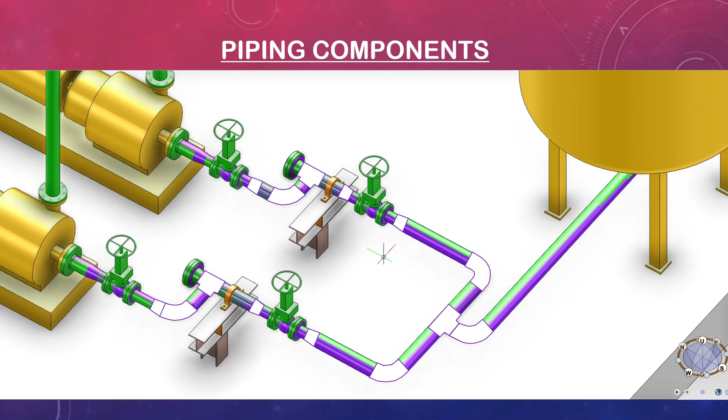If you thought our last deep dive into industrial pipe specifications was complex, prepare yourself. We're diving into part two of this forensic examination, moving beyond the simple straight pipe and focusing on the crucial components that allow engineers to build a functional system. We're talking about the difference between moving water and moving high-pressure superheated steam in an environment that cannot afford to leak. Our mission today is a targeted exploration of the components that define flexibility, integrity, safety, and ultimately the lifespan of any industrial piping system. We're talking fittings and flanges.

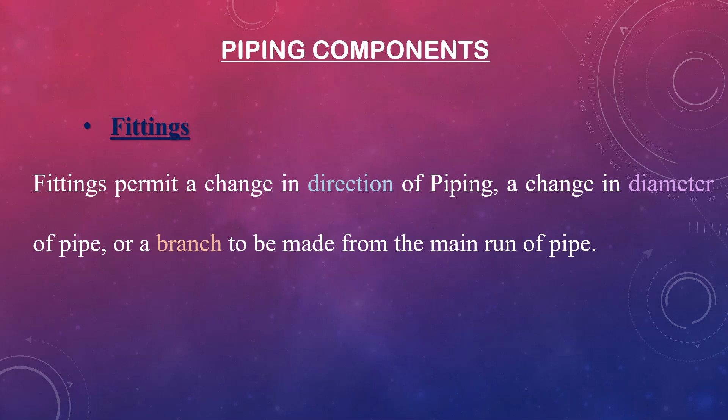Let's unpack this and start at the physical foundation, the fitting itself. We're defining fitting simply as the components that execute directional changes, diameter resizing, or branching within a run of pipe. Fittings come to the project via four primary manufacturing routes: they are either formed from plate or existing pipe material, machined from prepared forged blanks, classically cast using molten metal, or for lower pressure applications, molded from specific industrial plastics.

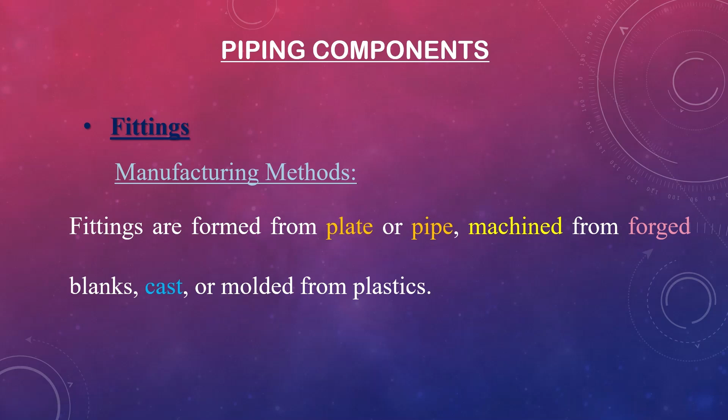We need to focus on the metal side first, because that's where the truly punishing high-pressure specifications reside. Can we start with manufacturing components from pipe material itself? That method is primarily used for creating long radius bends, produced either through hot bending or cold bending. For example, hot bending might involve inducing a curve using high-frequency induction heating while the pipe is mechanically stressed. It's very precise and ideal for large, gentle curves.

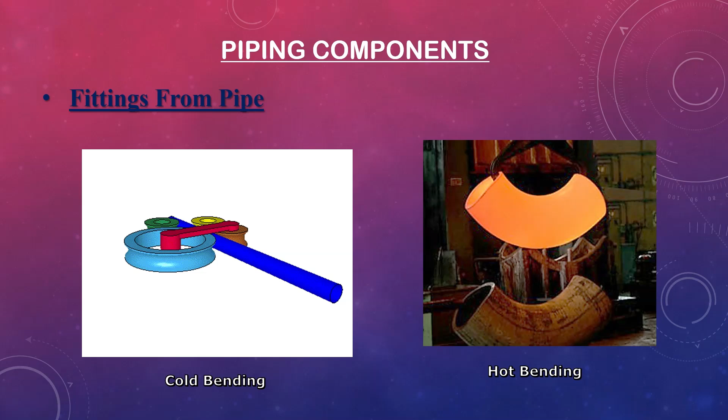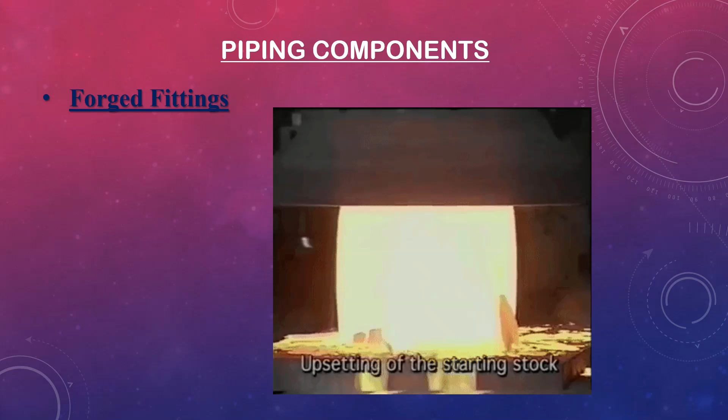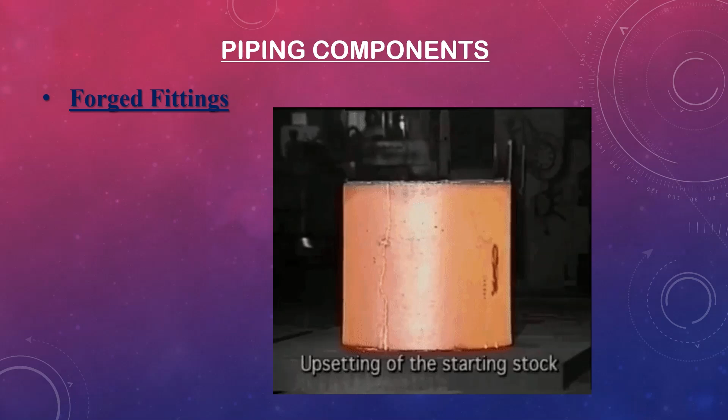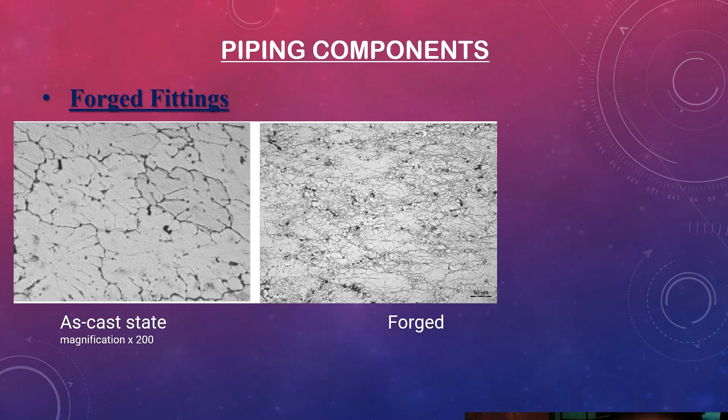But when we talk about elbows, tees, and components that face really intense thermal and mechanical stress, we usually pivot to forging. Why is forging considered the gold standard for high-integrity fittings? Because forging is fundamentally about physical strength through structure. It uses intense pressure hammering or squeezing to achieve plastic deformation of the metal blanks. Picture a cheap cast iron skillet versus a finely crafted forged knife. Casting leaves behind microscopic defects like voids or a loose structure. Forging eliminates those as-cast defects, and critically, it optimizes the internal microstructure, aligning the grain of the metal along the stress lines.

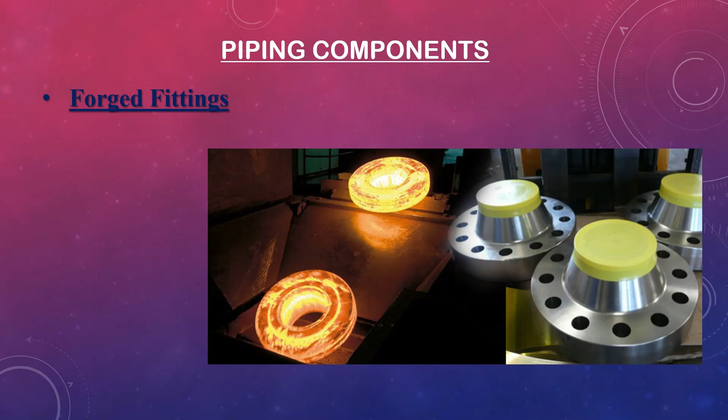So it sounds like you're engineering the component at a molecular level, and that results in superior strength and durability. Absolutely. That's why the most critical components—elbows, flanges, tees, unions, couplings, and caps—are overwhelmingly forged.

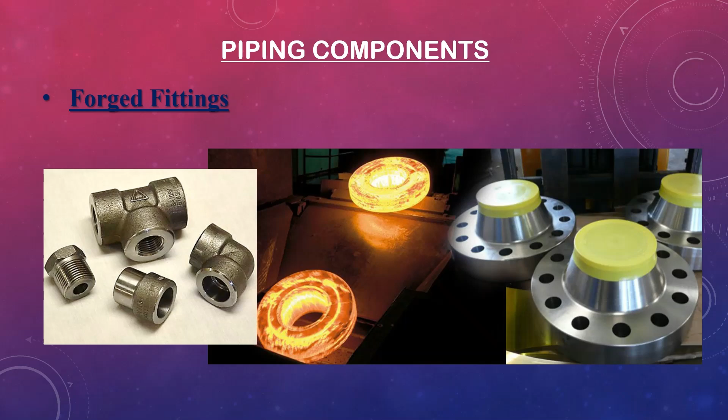Now, contrast that high-integrity method with casting. You mentioned cast iron fittings—where do they fit in the industrial puzzle? Cast fittings are simpler, created by pouring molten metal into a mold. They are used for lower pressure or non-critical applications. For instance, non-malleable gray iron is mainly used in residential or commercial construction for sanitary and waste drains. You also have ductile iron, which is stronger and often comes flanged, and malleable iron, which is cast iron that has been heat-treated post-casting to make it tougher and less brittle.

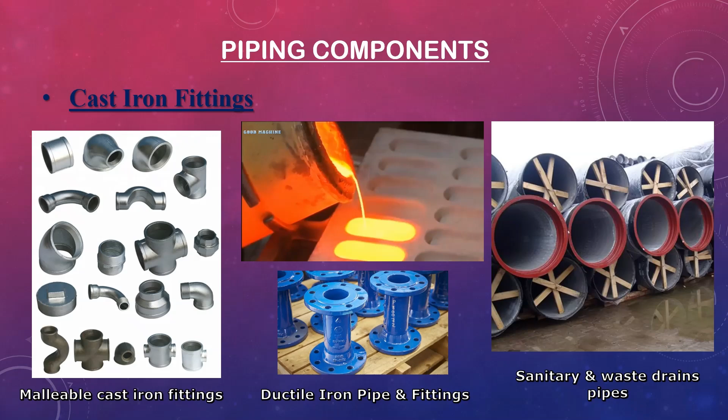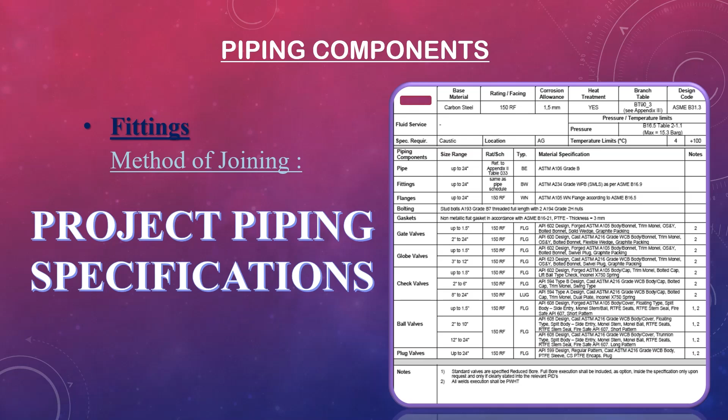So once the fitting is manufactured and ready for the field, the entire specification pivots to the joining method. The project specification dictates the choice for every single joint. This isn't optional, is it? No, not at all. The joining method is a non-negotiable choice based on the fluid, the pressure, the temperature, and the size. We have four primary methods, and the decision tree for choosing one over the other is extremely technical.

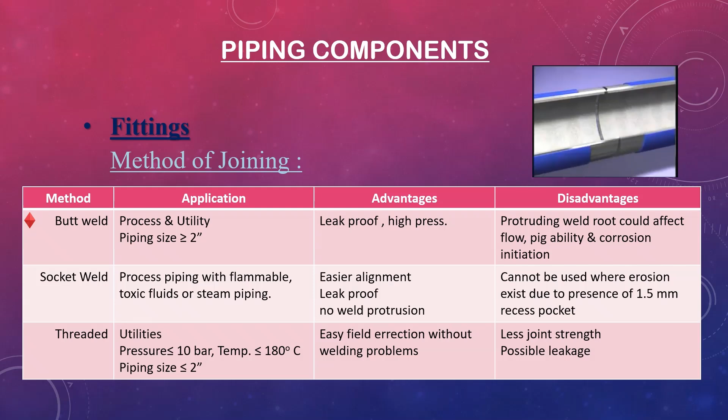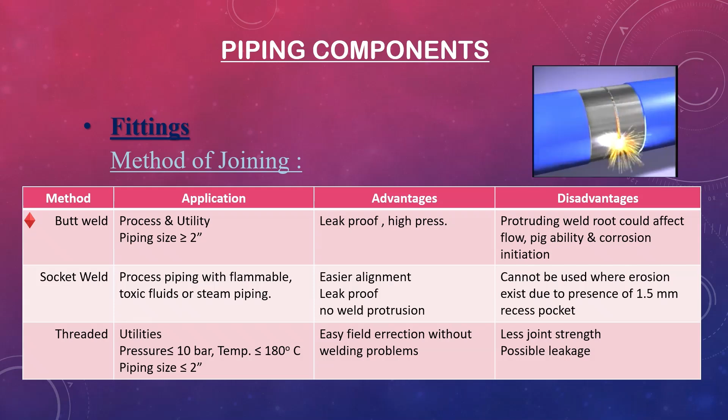Let's start with butt welding, which sounds like the most permanent and robust solution. Butt welding is mandatory for high-stakes process and utility services, especially for pipe sizes larger than 2 inches. This is the definition of a totally force-locking joint, offering maximum resistance to leakage, and is rated for the highest operating pressures. We see this in critical lines for drinking water, raw industrial waters, and high-pressure steam.

But you mentioned the downside, which is a key technical trade-off—the internal weld root. That protruding weld root can be a significant disadvantage inside the pipe. First, it may slightly affect flow characteristics. Second, and maybe more critical for maintenance, it impacts the ability to use internal inspection devices, or PIGs. For listeners unfamiliar, these are self-contained tools, inspection or cleaning robots pushed through the pipeline to check for corrosion or debris. Exactly. And if that weld root sticks out too far, it snags or damages the PIG, halting inspection. Furthermore, that protruding root creates a tiny turbulence point that can sometimes initiate corrosion over decades of service.

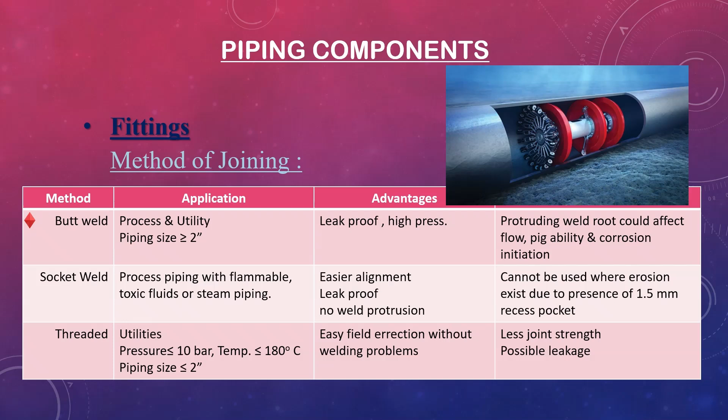So if butt weld is for big, high-pressure, high-flow applications, the socket weld seems tailored for smaller, equally critical lines. Socket weld fittings are designed for process piping under 2 inches that carry flammable, toxic fluids or high-pressure steam. Their pros are clear: they offer easier alignment and faster assembly than butt welds, they are leak-proof, and they avoid that problematic internal weld root protrusion. But the drawback here is startlingly specific, hinging on a microscopic distance. Socket welds cannot be used where erosion is a concern, and that's due to the mandated presence of a 1.5 millimeter recessed pocket between the pipe end and the fitting wall.

If you have erosive fluids moving at high speed, that tiny stagnant pocket becomes a vortex, initiating rapid corrosion or erosion failure. It's a fundamental physical limitation of the design.

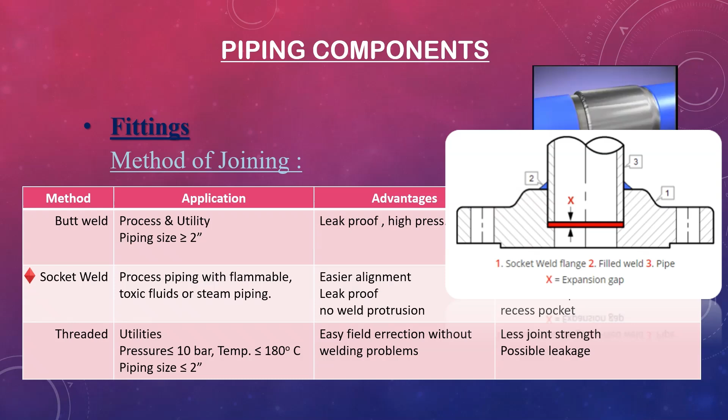During assembly, there's another precision rule: the expansion gap. You must leave a 1.5 millimeter expansion gap between the pipe end and the socket before welding. This gap accommodates the thermal expansion that occurs during welding itself. If you don't leave that gap, the weld is under immediate, immense internal stress as it cools, leading to eventual cracking. That level of precision is truly humbling.

Finally, we have threaded fittings. These feel like the easy access option. They aren't. Threaded fittings are severely limited, restricted mainly to utility services, and only under strict parameters: pressure must be 10 bar or less, temperature 180 degrees C or less, and pipe size 2 inches or smaller. The major benefit is installation speed without complex welding.

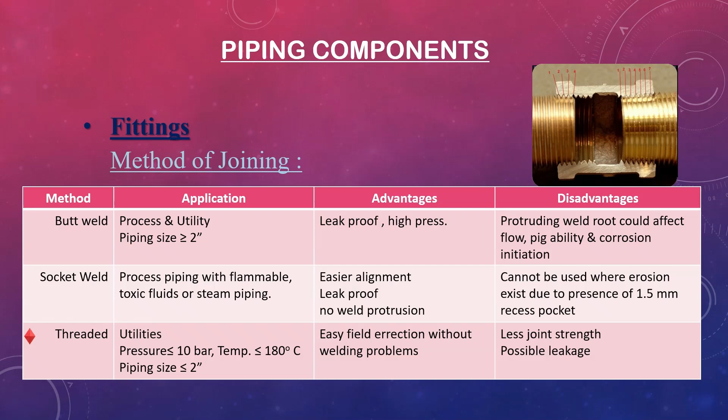But how often does that speed compromise the system? Well, that's the critical compromise. Threaded joints offer significantly less joint strength and carry a much higher possibility of leakage compared to any welded connection. They are fundamentally a lower integrity joint, only justified by the ease and speed of field erection for non-hazardous services.

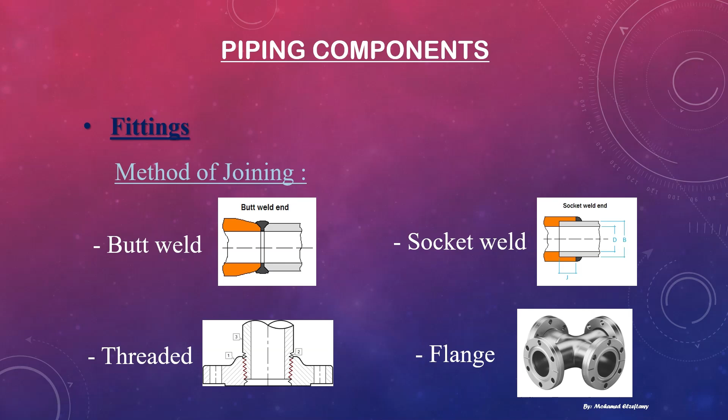So we've covered permanent joints. But what if we need to open the system for maintenance, perhaps replacing a critical valve, inspecting a pump, or swapping out a segment? That's where we pivot to the dismantling joint, the flange. Flanges are essential whenever you need a connection that must be dismantled for inspection, routine maintenance, or replacement. The system simply can't function without them.

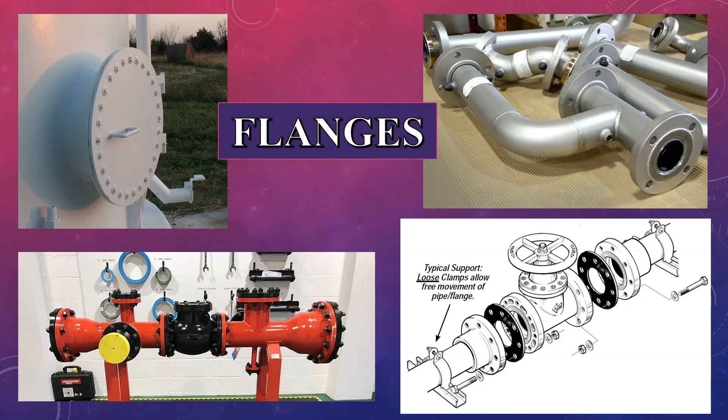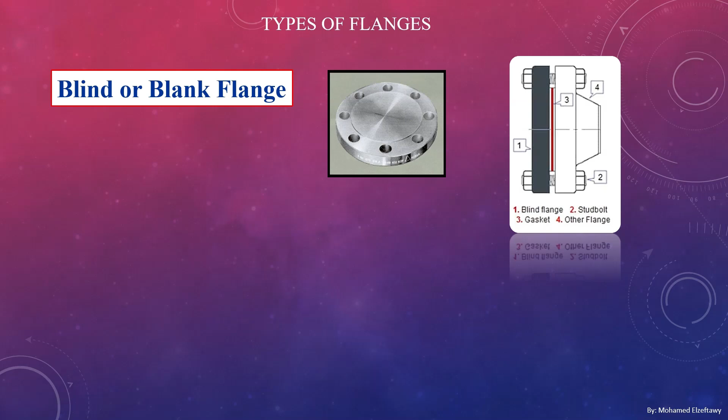Let's look at the variety, because the configuration determines its purpose, starting with what is essentially a heavy-duty cap, the blind flange. A blind flange is used to terminate or permanently close the end of a pipeline or a vessel nozzle. Crucially, because it's bolted, it provides quick bolted access to the interior of the line for inspection, which is impossible if you simply weld on a cap.

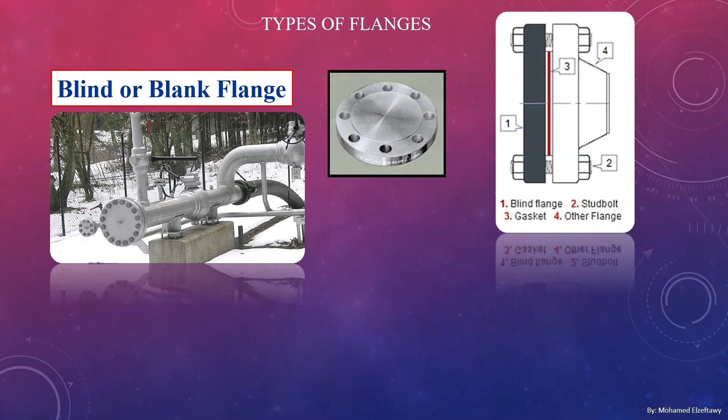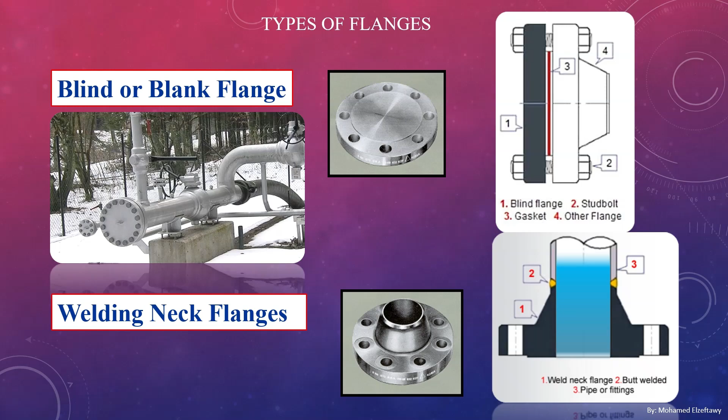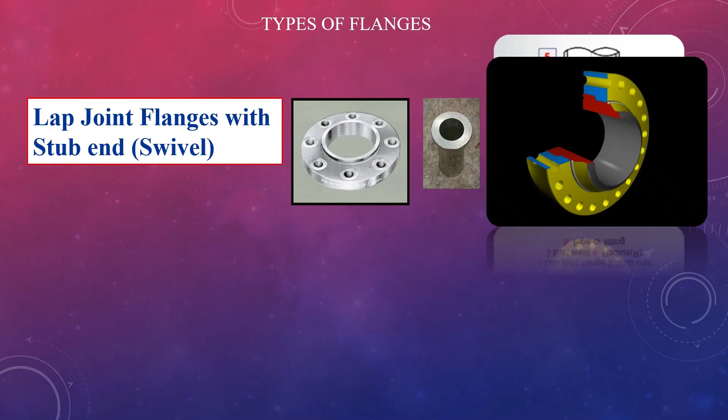That makes perfect sense. Now, the lap joint flange, or swivel flange, sounds like the maintenance dream. It is. It is designed specifically for systems requiring frequent dismantling. The genius is that the flange can rotate freely around a stub end that's welded to the pipe. This allows for quick bolt hole alignment. You can spin the flange to match the holes, making erection much easier, especially when dealing with large, heavy, and difficult to adjust piping runs.

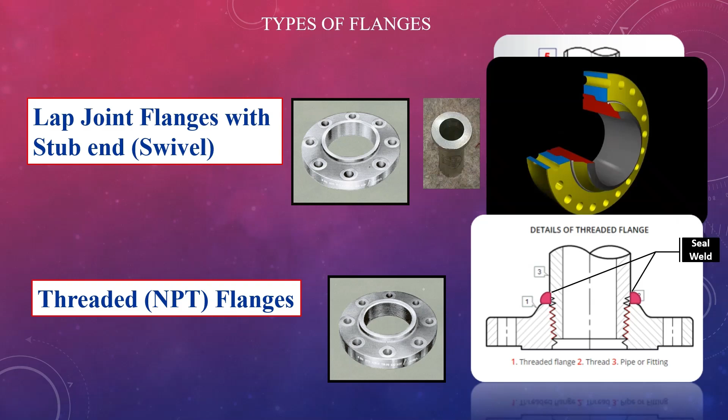Moving through the rest: threaded flanges and reducing flanges. What defines their operational envelope? Threaded flanges offer that benefit of assembly without welding, making them ideal in explosive or highly restricted environments. However, they are highly susceptible to leakage caused by thermal cycles or bending stresses. So they have a weakness. They do, and engineers often mitigate this risk by seal welding them after assembly, which, ironically, eliminates the original non-weld benefit.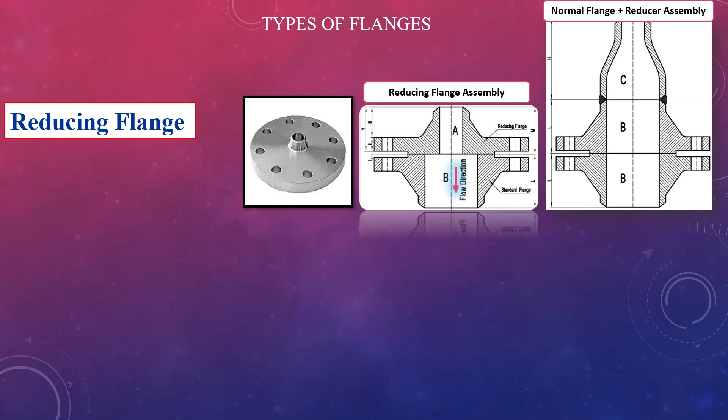And the reducing flange performs two jobs at once. It reduces the pipe diameter while also providing a flanged connection. But here's the critical operational detail: the flow must travel from the smaller side to the larger side. If the flow is reversed, the sudden increase in velocity and subsequent expansion will cause severe turbulence and potentially localized erosion right at the reduction point.

Finally, the orifice flange, which is all about metrics. The orifice flange is strictly for measurement. It determines the flow rate by measuring the pressure drop across an internal device called the orifice plate. The assembly is unique because it includes specialized fasteners called jack screws. These screws are specifically built into the assembly to force the two flanges apart, allowing maintenance crews to inspect or replace that orifice plate without extreme manual force.

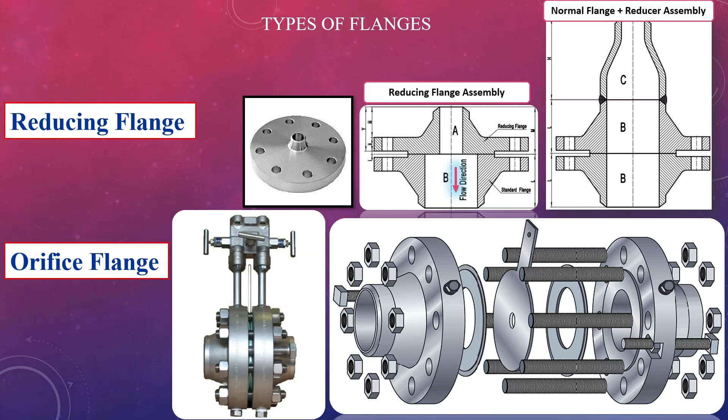So the flange design and material get the liquid where it needs to go, but the specific contact surface, the face and the seal, the gasket, ensure the system doesn't hemorrhage its contents. Let's move to section 4, and the critical details of flange faces and gaskets.

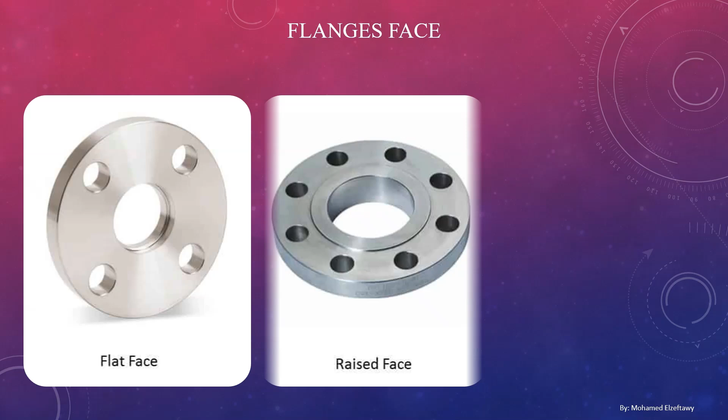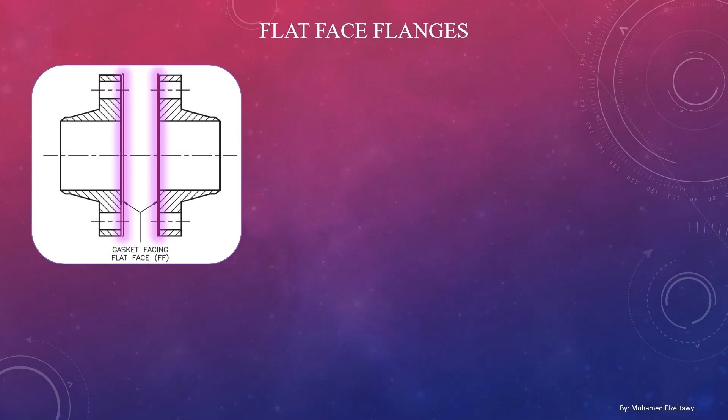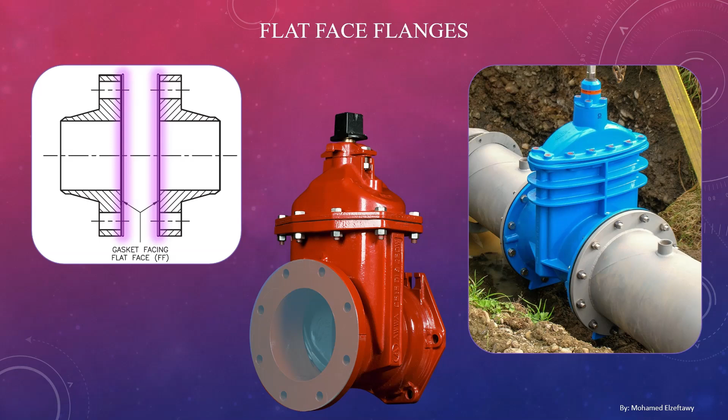What are the three main faces? They are the flat face, FF, the raised face, RF, and the ring-type joint, RTJ face. The flat face is completely level. It's used almost exclusively when connecting steel flanges to low-pressure, brittle cast iron equipment or valves. Why brittle material specifically? You need that full contact surface to prevent the intense bolting stress from cracking the cast iron face.

And the raised face, or RF, which is the most ubiquitous. The raised face has a small protrusion, and its purpose is simple geometry. It concentrates the entire bolting force onto the smaller surface area of the gasket, which guarantees a positive, reliable seal. And the height is standardized.

Precisely. It's 1/16 of an inch for Class 150 and 300 flanges, but it jumps up to a 1/4 inch for pressure ratings of Class 400 and above, reflecting the greater force needed for high-pressure sealing.

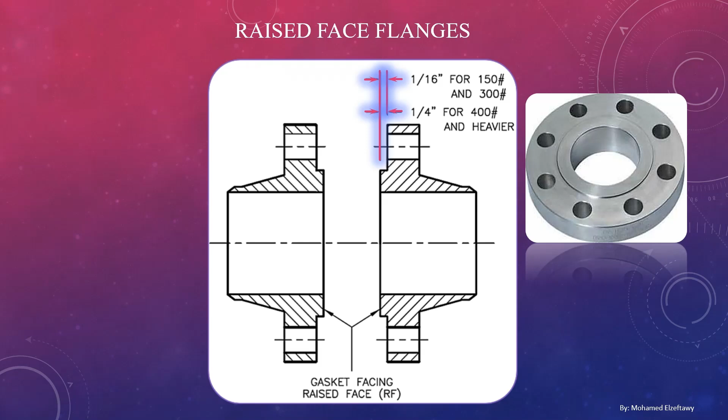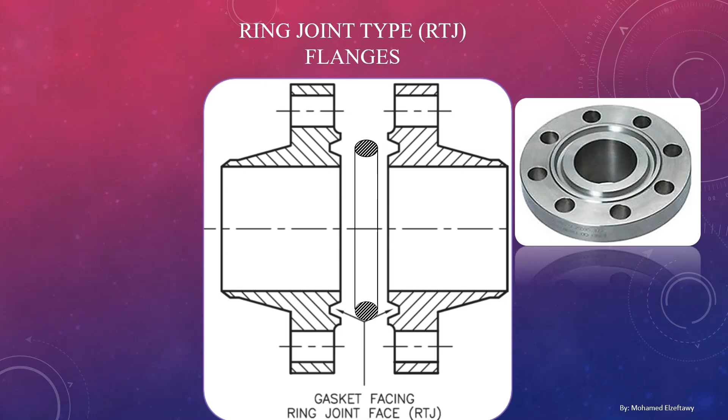Then you have the ring-type joint, the RTJ, which skips the traditional non-metallic gasket. It relies on a heavy metallic ring that seats in a deep, machined groove. This is the choice for systems rated 400 psi and much higher. However, while robust, it creates maintenance difficulties. To dismantle an RTJ connection, the flanges must be forcibly separated to extract that ring from its groove, which can be a nightmare in cramped, confined installations.

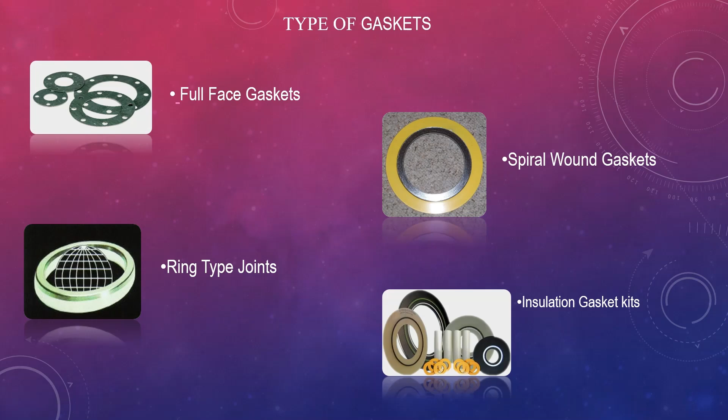Let's talk about gaskets, the consumables that complete the seal. Starting with full-face gaskets. These are typically non-metallic, often PTFE or graphite-coated, and primarily used on flat-face flanges for low to medium pressure general services. Because they cover the entire surface, replacing them means the entire joint must be fully disassembled and separated.

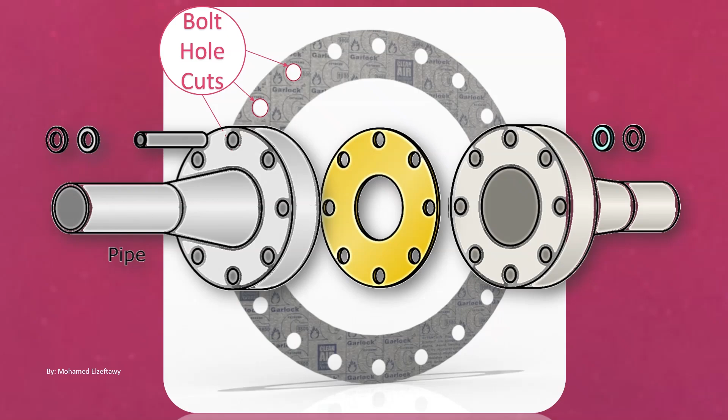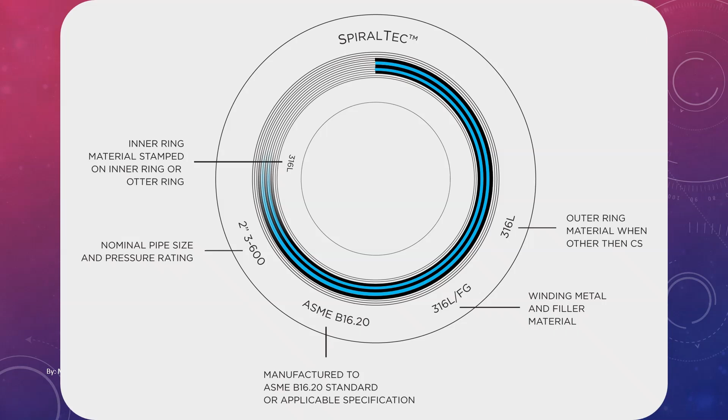And the complex spiral wound gaskets. These are highly resilient. They consist of metallic winding, providing the structural strength, combined with a non-metallic filler, which provides the actual sealing element. They handle a massive range of temperature and pressure, and here's a fascinating detail for specifiers: the color of the outer ring on the gasket is standardized by ASME B16.20 to indicate exactly which type of metallic winding material is used.

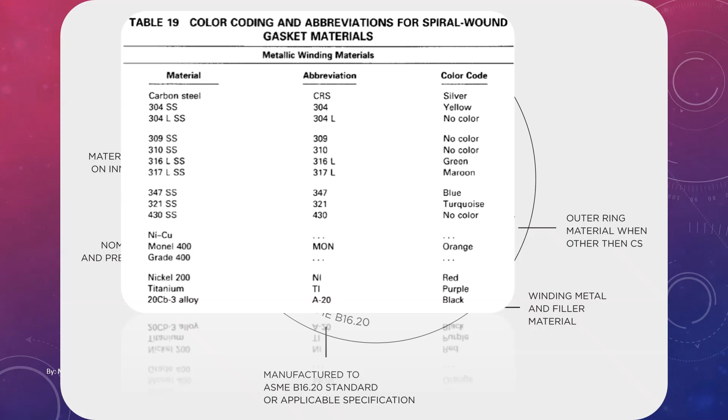Now back to the metal-on-metal sealing of the RTJ gaskets. What is the fundamental, non-negotiable material rule here? This is critical and purely mechanical physics. The RTJ's functionality relies on the softer metal of the gasket being compressed into the groove of the harder flange material, allowing it to flow and form a perfect seal.

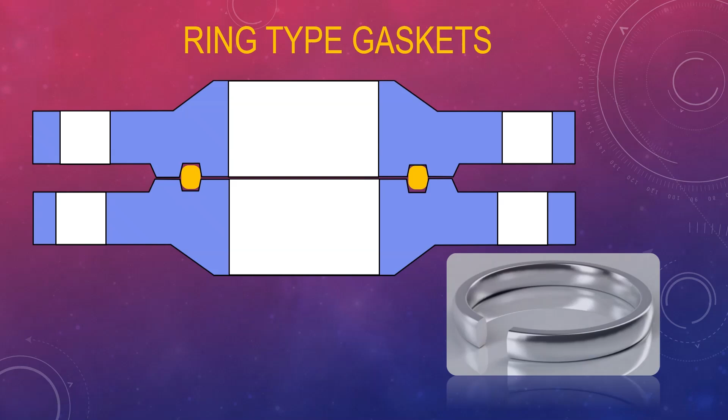Ah, so it has to be softer. The absolute rule is that the gasket material must always be softer than the mating flange material. We see three main types: type R, oval or octagonal; type RX, interchangeable with R; and type BX, which is designed for the highest pressure systems where the two flange faces actually touch.

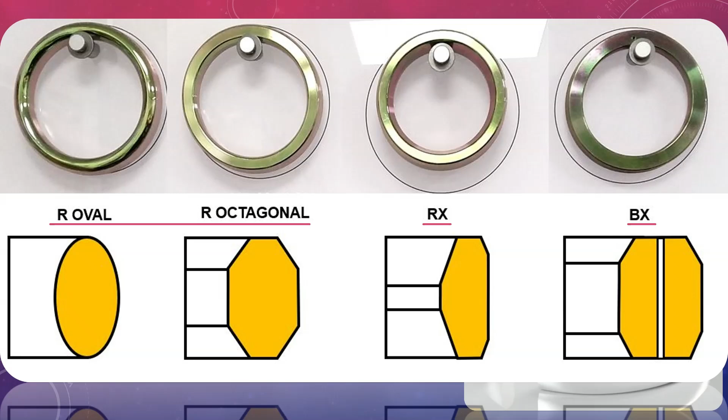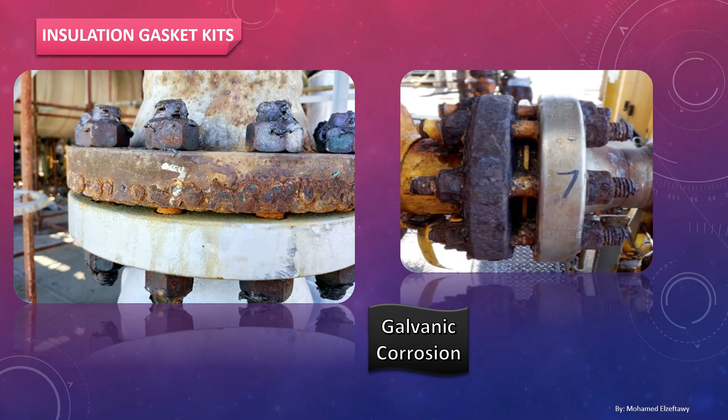And one final type of gasket that addresses a chemical issue rather than a pressure issue: insulation gasket kits. Their primary purpose is to stop galvanic corrosion. When you connect two dissimilar metals, say a carbon steel flange to a stainless steel valve, and add an electrolyte like water, you create a battery. The current flows, and one metal corrodes rapidly. These kits provide a complete electrical insulation of the joint to prevent that current flow.

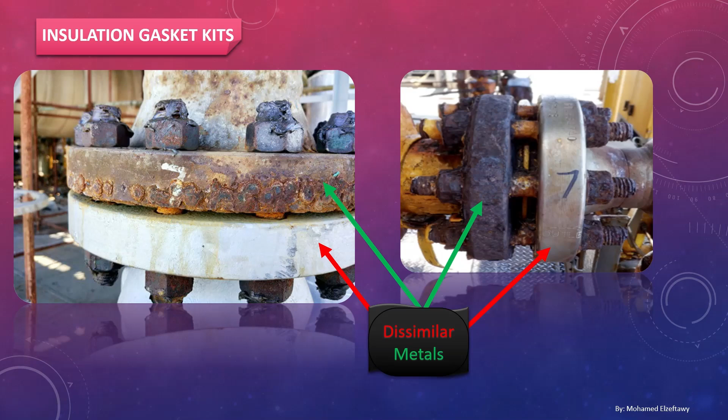They come in full face, inside bolt circle for better centering, and specialized DRTJ kits for the metallic ring joints.

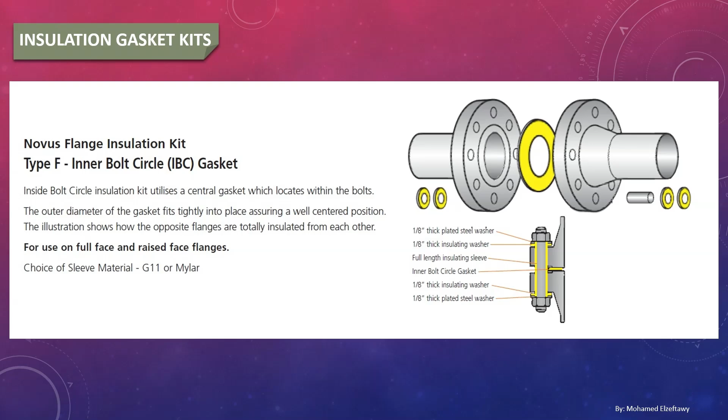That brings us to section 5. Synthesizing all this detail into one single, defined master specification to fully describe a flange for purchasing and compliance, there are 5 mandatory categories of information needed. That's how we group them. To specify a flange, you need 3 pieces of information that define its size and strength, and 2 that define its connection method. Let's list them using that framework.

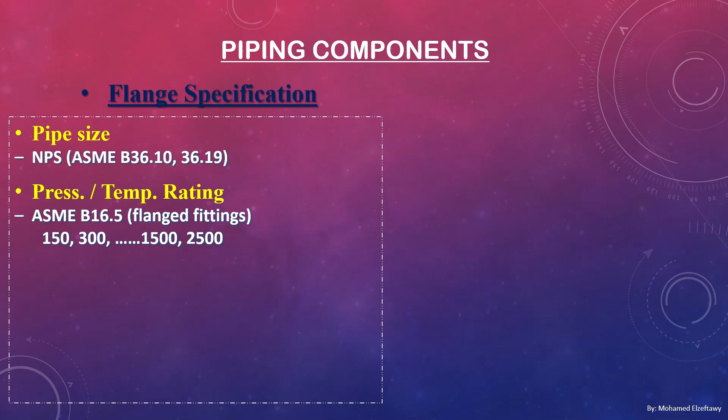Size and strength are: 1, nominal pipe size, NPS, governed by ASME B36 standards; 2, pressure temperature rating, which uses ASME B16.5 for flanged fittings classes 150 up to 2500, or ASME B16.11 for socket weld and threaded fittings classes 3000 up to 9000; and 3, material designations specified by ASTM standards like A105 or A182.

And the connection methods: 4, end types - weld neck, socket weld, swivel, threaded; and 5, flange face - FF, RF, or RTJ. You need all 5.

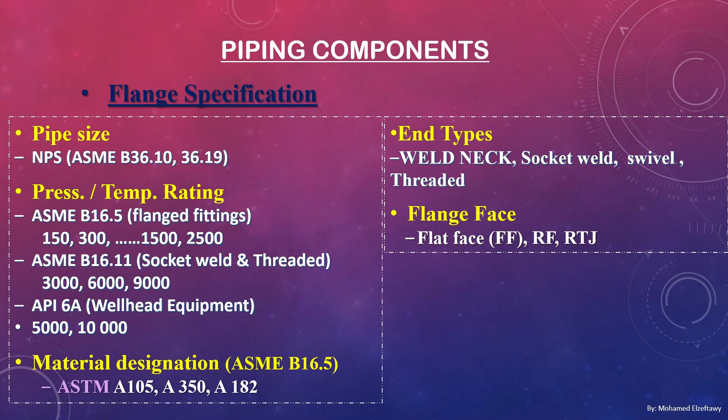Here is the complete example specification we pulled from the source material for you. Flange 6, #900, RTJ, WN, Schedule 80, ASTM A105. Let's break that down piece by piece. Okay.

That spec means you are getting a 6-inch flange rated for pressure class 900. It uses the highest integrity face, the ring type joint, or RTJ, and it has a weld neck WN type for stress management. It's compatible with a Schedule 80 pipe thickness, and critically, it is made of ASTM A105, which is the standard carbon steel used for non-corrosive process gas or utility piping.

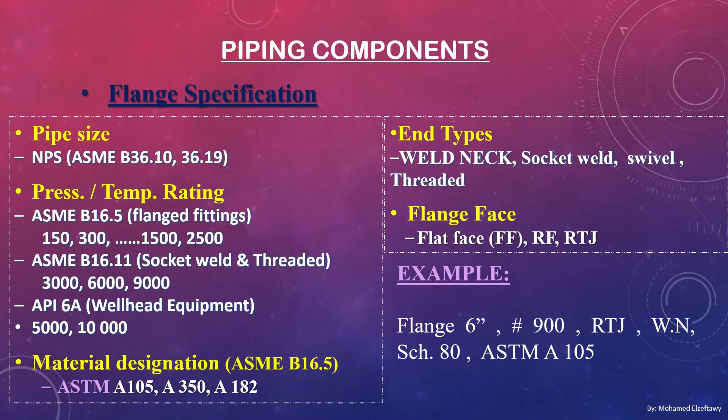And that material designation at the end is chosen based entirely on the service conditions. Precisely. Carbon steel, like SA105, is fine for standard processes. But if you have low-temperature services, perhaps a freezing utility line, you must switch to SA350 grade LF2 to maintain ductility and prevent brittle failure.

And for corrosive stuff - for services that are seriously corrosive or erosive, you jump entirely to duplex stainless steel, SA182 grade F51. Why duplex specifically? Duplex stainless steel offers a combination of corrosion resistance similar to high-end stainless but with superior strength, which is essential when the fluid itself is constantly attacking the pipe wall.

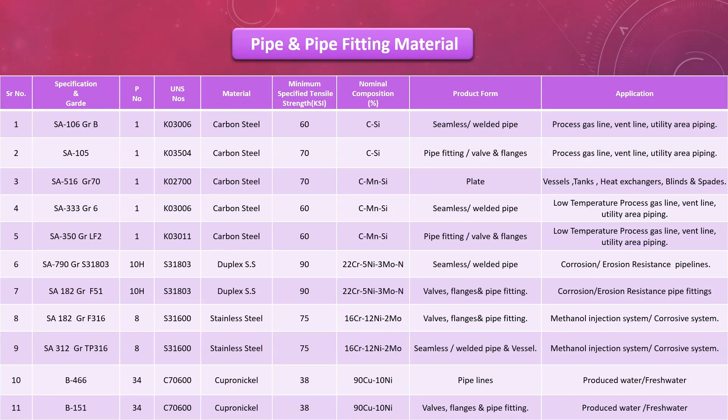Likewise, produced water or freshwater lines often require cupronickel or B466 due to its specific resistance to marine and biofouling environments. So we've covered everything from how you deform the metal blank to optimize its grain structure, all the way down to the exact material softness required to create a perfect metal-to-metal seal between the flanges.

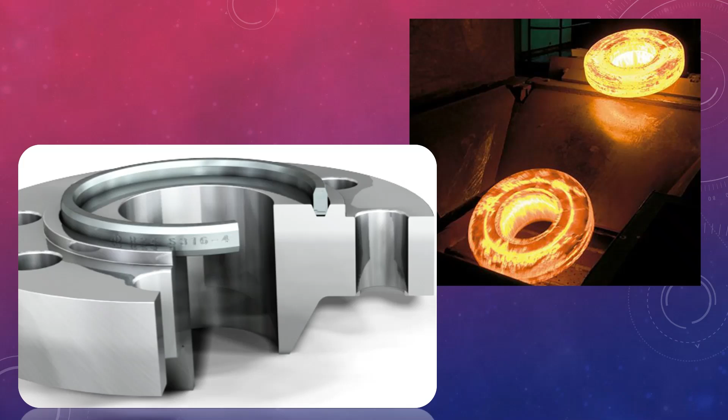The necessity of precision here defines the industry. The difference between a reliable, compliant system and catastrophic failure often comes down to that tiny 1/16 of an inch height difference in a raised flange face, or ensuring the correct type of insulating gasket kit is used to prevent the hidden menace of galvanic corrosion.